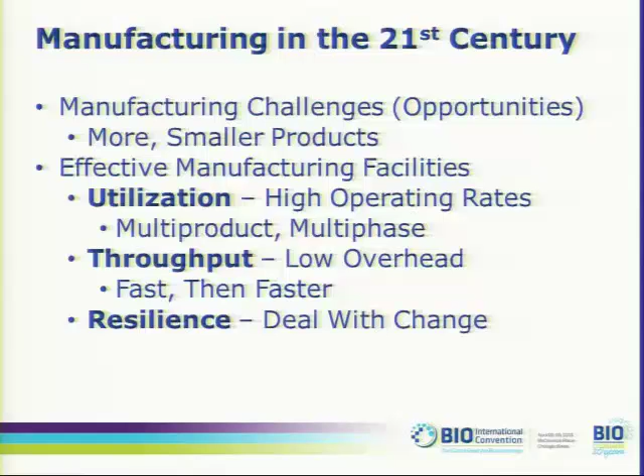And change is here. We are going to continue to see a dynamic change in the industry because of the science, because of the new types of products, increases in titers and yields, and that change is something that we are going to have to be able to address much better than we have in the past 2 decades.

So if we look at what has gotten us here, well, a lot of the advances have come not only from the science but also in the advances from an engineering standpoint. As we mentioned, the productivity of the process itself has dynamically increased and will continue to do so.

The advent of single-use equipment for the first time really since its introduction into the industry a number of years ago. From vial to vial, for many applications, you can find a single-use solution for your unit operational needs. Now, there are still some challenges with regards to scale and certain types of product lines, but we have that ability, and that is something that we didn't have in the past.

This also gives us a tremendous advantage from an infrastructure standpoint. We're looking at a fundamental shift in what a facility will actually look like. We sort of joke about it, but if you are in the business or you're one of these people who loves to take advantage of the opportunity to go on plant tours for any given local event you may have at a professional society, they're going to become sort of boring

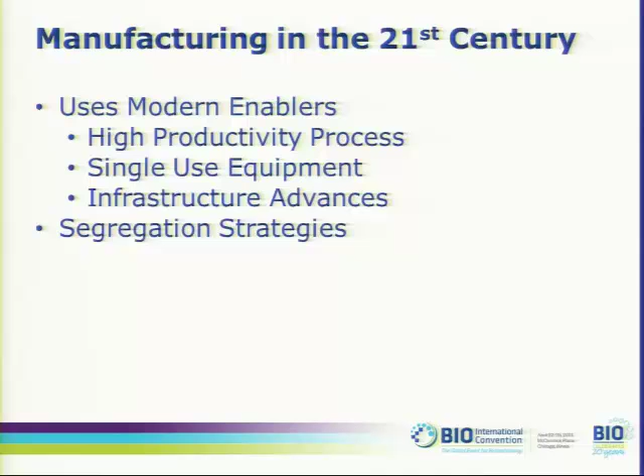So as we talk about this concept of facilities, the idea is to maximize the opportunities that a company has, whether you're a CMO, whether you are manufacturing a mainline biologic, or in some instances it may be part of some program that, for example, is run by or administered by federal agencies where pandemic response is the key. The ability to adapt and have flexibility in your manufacturing operations is critical.

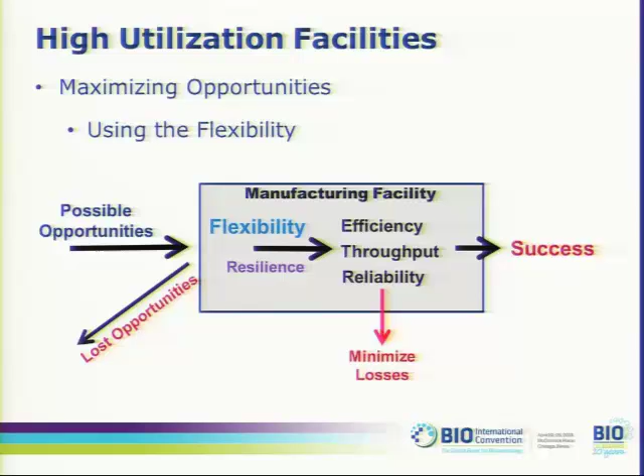The one thing in this model that's important is to minimize those lost opportunities and to make sure that as you look at all of the inputs and define unit operation parameters, not only is there an understanding of what the product attributes have to be, but in terms of the process itself and those parameters that are key and essential to meeting those needs, that we look at flexibility, we focus on the efficiency and throughput of the facility, and the idea is to minimize those lost opportunities and therefore minimize potential losses as well.

So the challenges then sort of fall into some very general categories. The ability to manufacture in multi-phase is one area, again, probably not for all, but many companies are looking at this as an opportunity to minimize capital expenditures, to do away with the fact that I may have to have 2 different facilities or possibly 3 to get me from the clinic into commercial phase manufacturing.

As Andy mentioned, the advent of biosimilars across the globe is going to present new challenges and issues for a lot of organizations as they begin to focus on how best to bring those products to the market. Changes with regards to the different therapeutic families of products.

We're seeing, again, with the advances in the science, more opportunities for different product types. The ADM, or Advanced Development Manufacturing model, is one right now. It is mainly the focus of different agencies within the federal government. We are involved in some projects of this nature, but it puts a new light on a different business model, and that business model is very, very focused on speed and flexibility.

When a pandemic event occurs, one of the things that you are wanting to occur very rapidly is the ability to identify the threat and respond in a way that protects the patient population as large and as fast as you possibly can. So fast is good, but faster is now the expectation. We are seeing this both in terms of expectations from a manufacturing standpoint. We're also seeing it in terms of the way that clinical trials are being designed and executed.

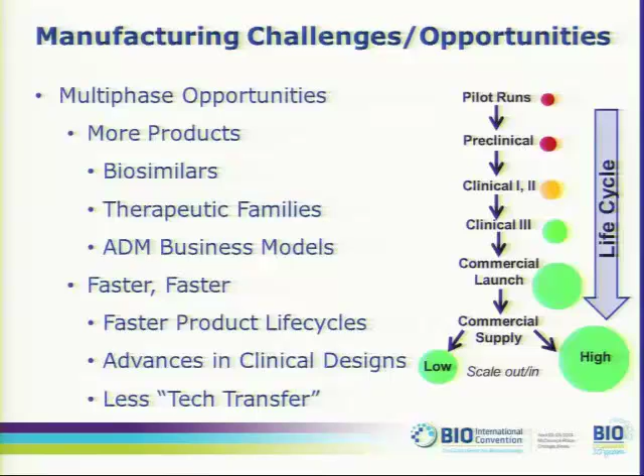And we also have found that if you look at this ability or this desire to minimize tech transfer from site to site or location to location, that too is playing into this, that more and more facilities will be able to handle not only development work, but also commercial manufacturing at the same time. So these enablers, we've mentioned some of these already.

We're seeing a great increase in yields. More and more, the idea of plug-and-play, skid-based type unit operations is becoming more common practice. The advent of continuous processing continues to grow. We see that in a lot of instances, the minimization of downstream unit operations is becoming more and more of a focus, not only from a flexibility standpoint, but from a risk perspective as well. And the efficiency at which those operations are being run is greatly improving.

Single-use systems are becoming more commonplace. We're seeing that not only are more and more companies beginning to focus on how they can implement these systems, but we're also seeing more of a focus from a regulatory standpoint on better understanding and analyzing risk when you talk about single-use systems and you talk about the ability to validate system closure and looking at risk to the product in single-use systems. So we're seeing this shift occur across the board.

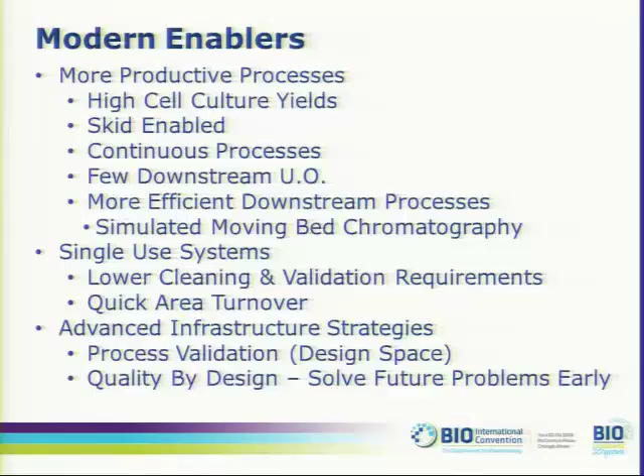And a lot of this is really being driven by regulatory changes that have occurred over the past few years, as we've seen the advent of Q8 and Q9, the new process validation guidance that was issued in 2011. These have sort of set the stage from a regulatory standpoint on how companies are beginning to look at conceptualizing their designs and developing manufacturing solutions for what they're going to do over the next decade. I'll let Mark talk a little bit more in detail about the segregation strategies and some of the models themselves, and then we're going to open it up and begin to deal with questions from the audience.

Thank you, Jeff. In the facilities design, one of the primary issues is the separation of the different processes and different unit operations that are occurring within the facility. So there is a separation imperative that must be met. To realize that imperative, you need to implement different segregation strategies, of which there are a couple. You can use facility time, and therefore you have a single unit operation or a single product within a facility for any given period of time.

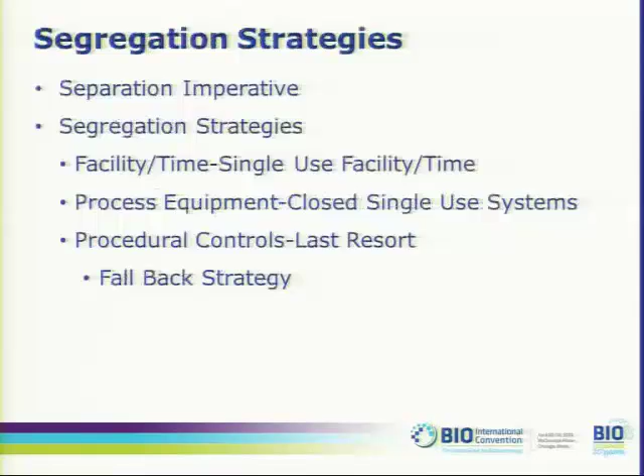But more recently, single-use technologies have developed a capability of having closed process systems. And another very important segregation strategy is the procedural controls which can be used to manipulate the two physical segregation capabilities that I discussed. In terms of primary physical segregation, you can have single-use facilities in time. In other words, you have basically campaigns going through where you separate the unit operations and the different products within space and time. These are run very independently. However, they consume a great deal of resources within the facility.

Recently, the closed systems have become popular, and there is a considerable amount of effort going into validating the use of single-use systems as being a widely used method of separating the different processes. However, there is more or less a real issue that has to be addressed. It doesn't appear to be common understanding in the industry. We really need a process validation paradigm when you talk about validation of closure.

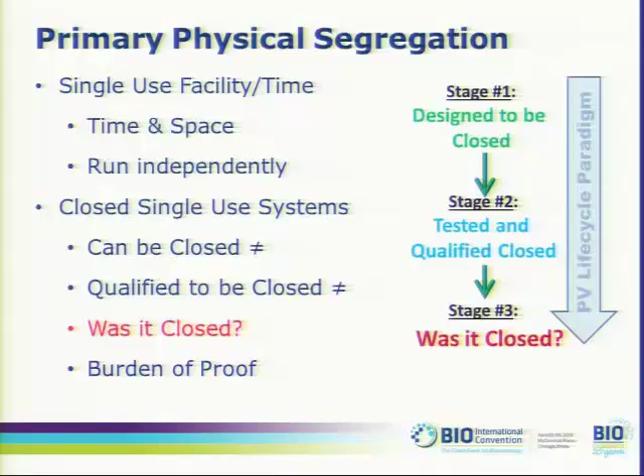There is the design to be closed, and this is what the single-use industry has been working on for a considerable length of time, and I believe they are there. There is the qualification that you have single-use closure, and this is tested and qualified to close. But when the FDA states that you must validate closure, they're really talking about the third hurdle, and that's the stage 3 or verification. And that is answering the question, was the single-use system closed at the time it was implemented? That places a tremendous burden on the systems that you use to establish that the single-use systems remained closed. And there is a tremendous burden of proof which is developing, and this is what the industry is beginning to wrestle with.

The current trend in the industry is to work with large operating spaces, and this provides the opportunities for manufacturing for multi-product by commingling products within large open spaces. If we take processes, they can quite often be divided into what can be called logical operating units, and this is how they are divided up. The number of logical operating units for a process can be between 2 to 7 or 8, depending on the process needs and what kind of segregations are required.

If you look at multi-product, then you would have more than one process or product within the space at the same time. This brings up a number of issues. While you can get reasonable utilization at this, you begin to identify some problems with resilience. Single-use systems are fairly complicated. A single-use bioreactor is a complex tubing set with up to 25 and maybe even more different tubing sets coming off of the tube. There's a lot of ways to mess that up. So you must deal with a system in which you have single-use problems.

Throughput is impacted by this type of design because there's a considerable number of interactions between the different products within an operating space. And that problem can be exacerbated if you look at multi-phase manufacturing. In other words, one of these processes might be early phase clinical while the other process might be commercial manufacturing. You also have reliability issues in terms of the failure interactions that you have to deal with.

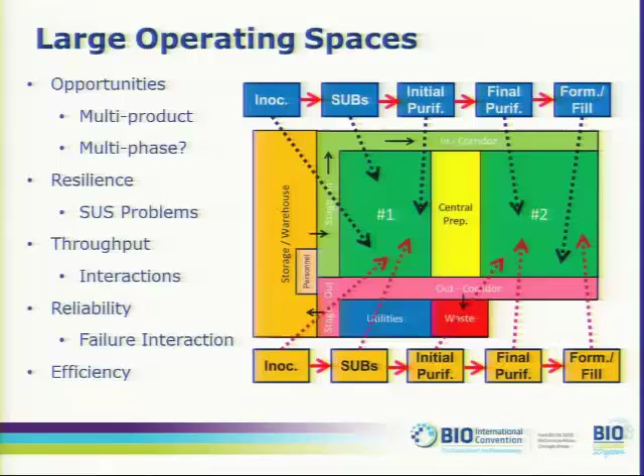The likely solution to that is to begin to look at facilities in which you have a matrix of rooms, none of which are dedicated to any specific operation, but allows you the flexibility to move these skid-mounted processes in and out as the availability of the facility is realized. You have an opportunity for both multi-product and multi-phase because all of the logical operating units are separated by individual space within the facility. The resilience and reliability is enhanced because any problem that you have with any of the unit operations is localized. It can be dealt with independently.

But one of the features that I think is the most attractive is that you have an enhancement of throughput and utilization because each one of these processes can be operated independently. In other words, you may roll in the inoculum step well before you would roll in any of the downstream processes, and so you would be able to segregate them. It would also give you even additional flexibility if there are hold steps between the logical operating units within the process.

And this also provides greater operability in the sense that you have incoming corridors shown in the light green. That allows you to operate the facility in a unidirectional mode, but it also allows you to operate it in a bidirectional mode depending on how your good manufacturing processes work for the specific processes. You have an outflow of material, so when you destage one of the unit operations, you can take it out the out corridor. It also gives the ability, in the case of a problem with one of the processes, to implement a unidirectional flow and thus preserve the integrity of the incoming corridors.

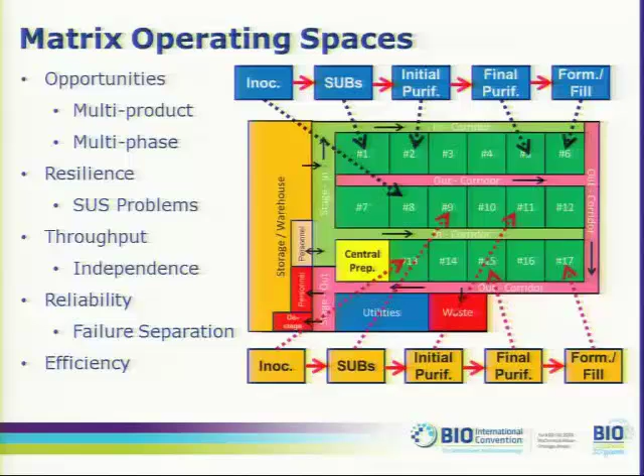And with that, I will turn it back over to Andy. Great, thanks. Thanks, Mark, I appreciate it. Since Dr. Carbonel is not here today, I'm going to do double duty and be a part of the panel as well as being a bit of a moderator here. So forgive us, we'll try a tag team flexible experiment.

You've heard a lot of different concepts here, concepts that are very new, concepts that are traditional. Let's start with any questions from the audience. We had a number submitted earlier, and I can go to those, but I'd be first interested directly from the audience.

Hi. I had a question about whether you see a difference in the manufacturing facility of the future for mAbs versus vaccines. How do you see those two being different, and what would they be like? Very good question.